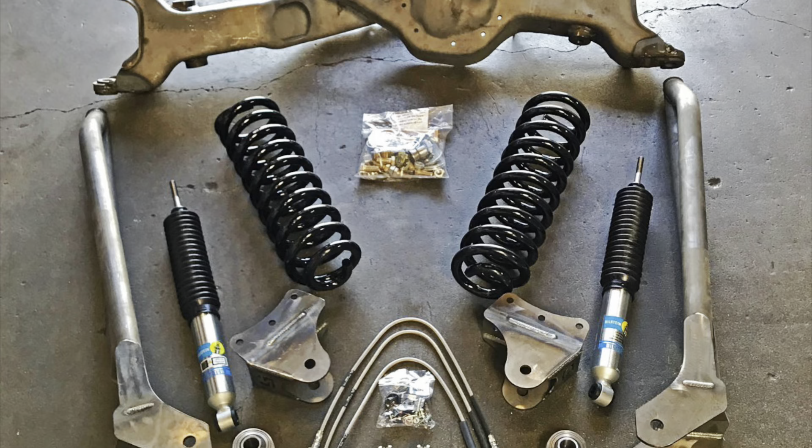Today we'll be talking about how to install the Solo Motorsports coil spring conversion kit, designed specifically for the F250 diesel truck. This kit also works for Broncos, depending on what year you have, but I'd recommend checking directly with Solo on that. I'm not an expert on Broncos, but most everything on a Bronco is pretty similar to the F250s. That's why this kit was designed to be a long travel kit for both.

The kit does come with instructions, but it's mainly just 4 photos. So I figured I'd show you an exploded view of the twin traction beam that you currently have on your truck if you've bought this kit.

Now, this is more detailed than you really need, but in essence, you're going to need all these Dana parts if they're fried. Like me, mine was fried except for the pumpkin itself. You can just reseal the pumpkin.

It won't be difficult to find those parts, and I'll have them in this video as well. But I figured it'd be useful to have this since it's all over the internet, and to know exactly what you're doing before you start removing these pieces, because you can easily damage your pumpkin if you don't remove it correctly.

You can lose some of these Dana parts pretty quickly whenever you're disassembling these parts, and it'll be hard to measure after you've removed them. For instance, your U-joints, you want to make sure you keep those.

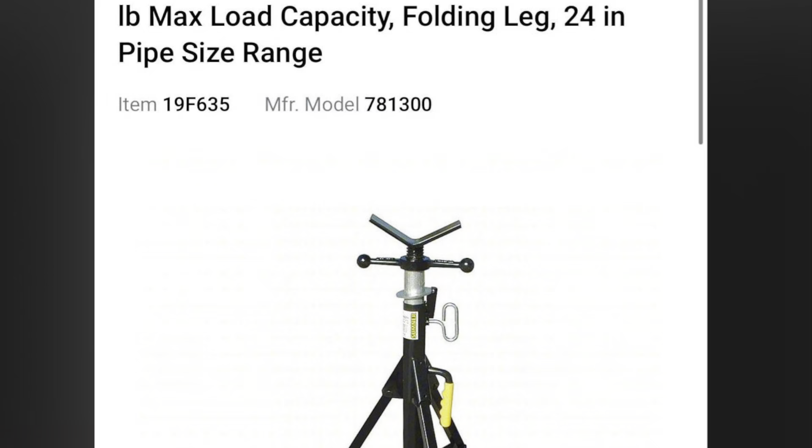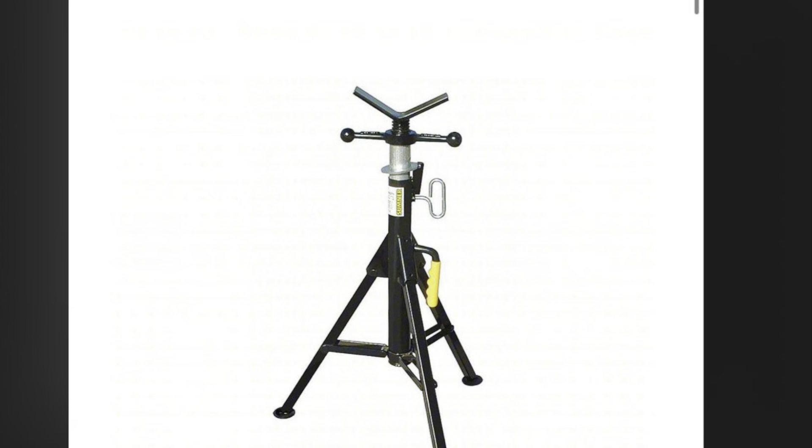Now, before you start this build, make sure that you've got a jack stand that looks like this. It'll really help you with raising and lowering the truck. You're going to need it for alignments as well. I didn't actually have to use it—I used a similar model, one of the larger 10K jack stands you can buy at O'Reilly's or AutoZone. Costs about $200. Safety is priority, guys.

All right, and this tool right here just makes your life so much easier. You want to make sure you mount these at the very front, near where your bumper's at. Take off your front bumper, by the way, to make it easier to get inside and get underneath the truck.

So step 1 in the disassembly of the twin traction beam is to remove your hubs, your spindle nuts, and all of your bearings, your lock washers, everything inside the housing. You want to make it a priority to put those aside in order in which you disassembled them. Don't lose those parts. You're going to need replacements, and it's very difficult sometimes because Ford in 1996 and 1997 was very finicky on the parts they selected, and sometimes they don't always match each other.

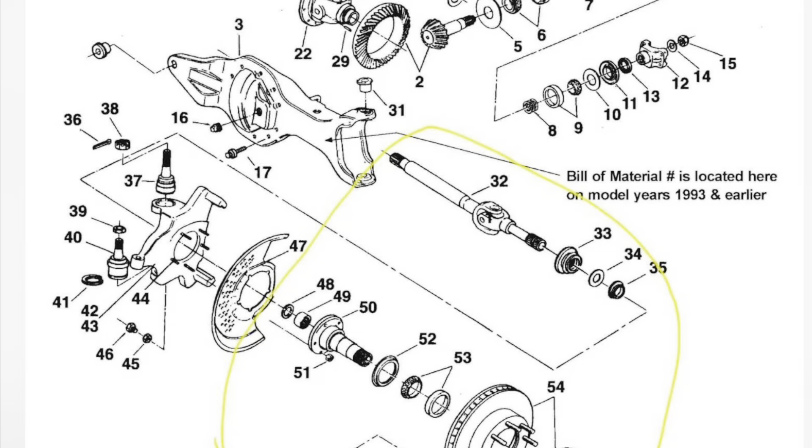Some people might have 4-wheel drive trucks, some might have 2-wheel drive trucks. If you had a different year from '95, some of your spindle nuts may not match, and you might have to get a different tool to remove these pieces. Very important to keep order of your parts as you disassemble.

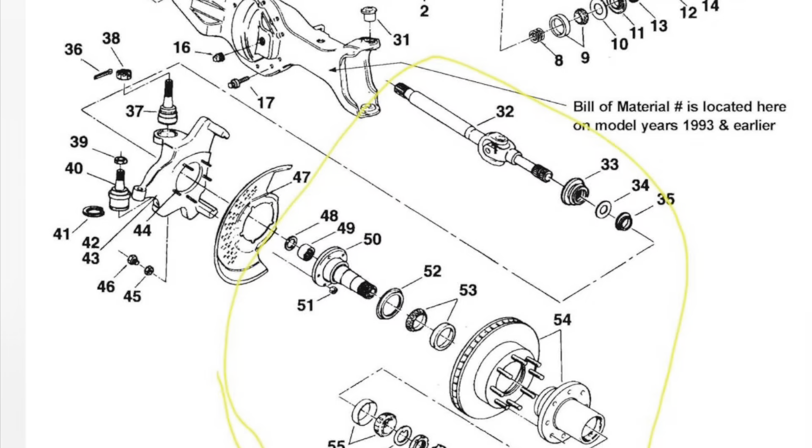Your next order of business will be the bushing at the top, which is part 31 in this schematic. Part 31 can give you a real pain in the neck to remove.

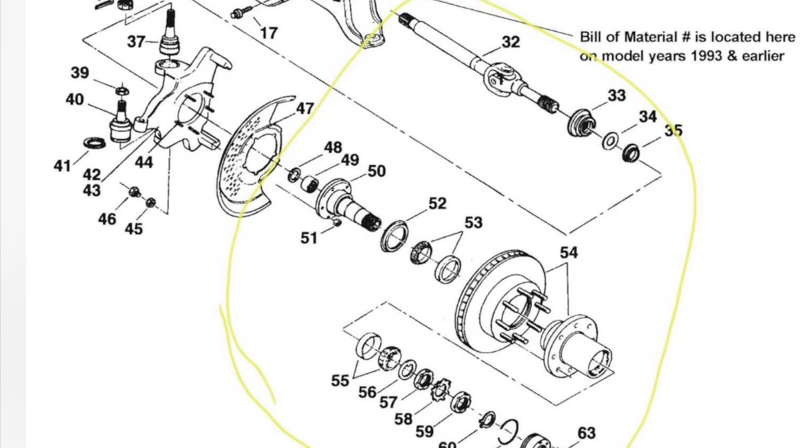I think I should also mention that finding the right Dana parts, such as your ball joints or any of the bushings connected to the twin traction beam, you need to keep account of.

So your very first order of business would look like this: your tire and wheel are off. You can get these rotors resurfaced, guys, you don't have to throw away your rotors. I had to get rid of mine because they were in bad shape and it was time.

But your first order of business here is taking apart everything you see in front of you, just as the image showed in the last exploded diagrams. I'm going to show some more here in a second. I'm not going to go into full excruciating detail about how to do this—there's plenty of videos online about how to take apart the hub and the 4-wheel drive assemblies. Just make sure, like I said, keep everything you have.

Before you start digging into this axle, your Ford manual will tell you the D85T-1197-A is the tool you're going to need to get out some of your nuts. Now, everybody has a different tool for this. Even though it says it in the manual, some of us have ones with indirect teeth, some with shaved down teeth, others are jagged.

It really just depends on if you have manual or automatic locking hubs, four-wheel drive or two-wheel drive. Here's your exploded diagram in the Ford manual with your inner and outer locking pin. Want to pay attention, one thing I'm showing you this document for is just the purpose of that pin. That pin can be very hard to locate, and if it's sheared off, you need to get a new inner lock nut.

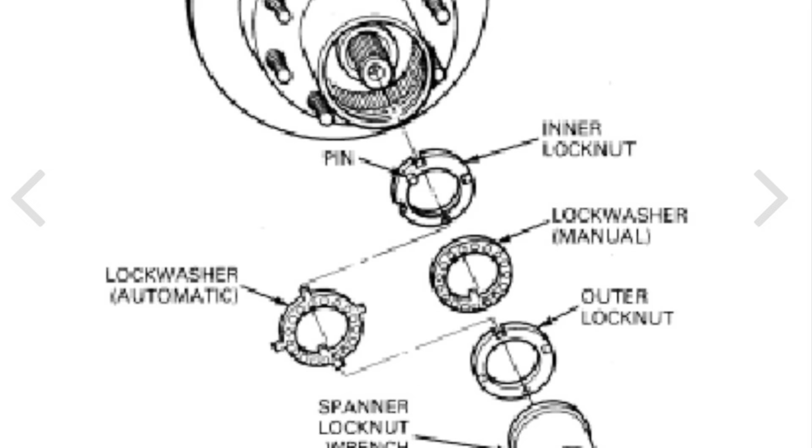Your manual lock washer and your automatic lock washer have different identifications. One has more slots than the other, and one has squared off slots on the outside with a tooth. That's where that difference in your tool is going to come into play, like I was discussing just a second ago, ordering the right tool based off the lock washer you have.

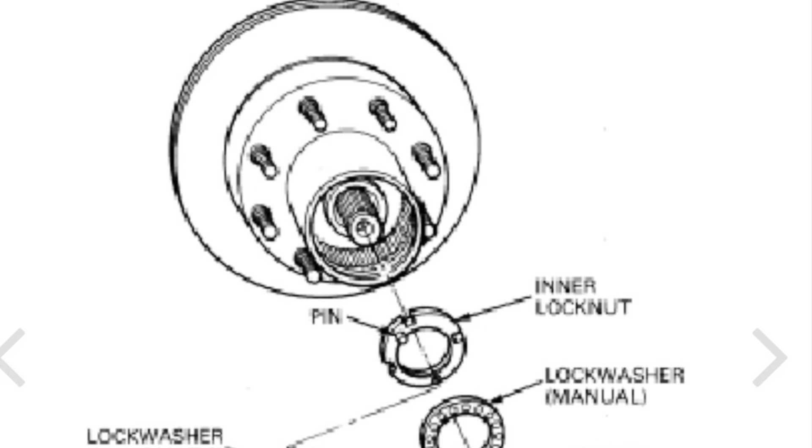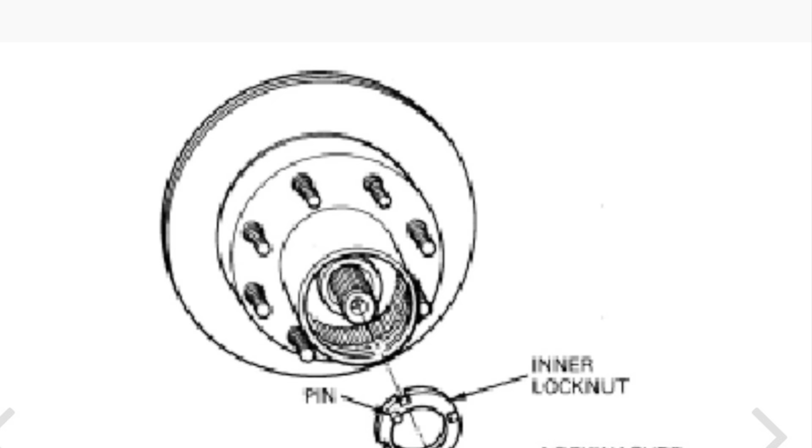So get in there, take a picture of what you have if you're not sure. There's plenty of Ford groups out there that can help, but all I can say is pay attention to what you have before you go buy a bunch of stuff. I went out and bought some kits and blindly did not realize what I needed. I won't lie to you guys, it's difficult to figure out which one is the right lock washer kit to buy because there's so many people saying that, hey, this is the right kit, Ford says it's the right kit. No, just because Ford says it's the right kit doesn't mean it's actually going to be specific to your truck.

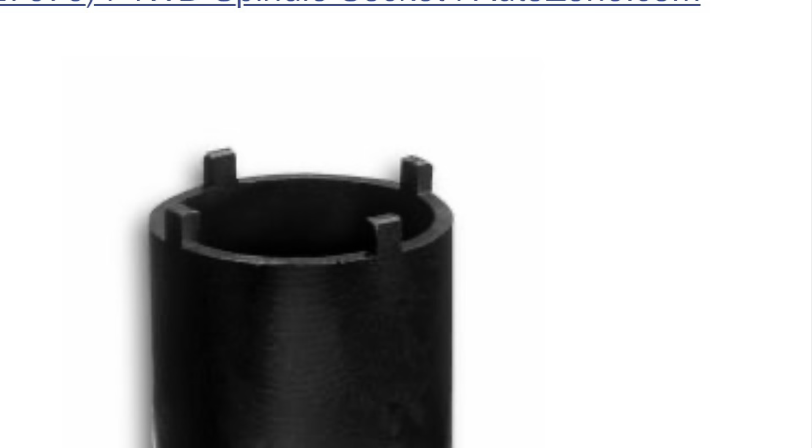This is the tool that was specific to my truck. If you had four-wheel drive, 1997 F250 with manual locking hubs, this one worked perfectly for what I needed it for. Didn't have to shave it down, didn't have to alter it. It worked great for the first lock nut. Now everything after that was this oddly shaped lock nut that you can find on, what's it called, Torque King sells it, and it has a strange configuration. It's kind of wave-like. That one will work for this truck.

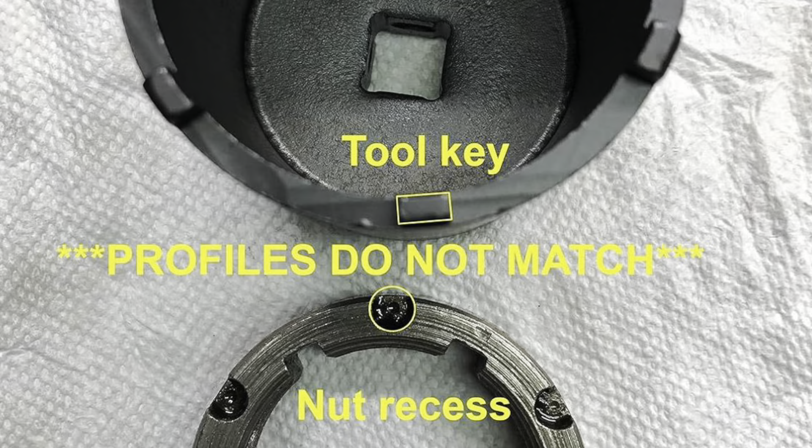Some of you might end up in this guy's scenario where you had to shave it down. This is an example, this is what I had on my truck for the manual locking hubs for my 96 F250 diesel. That lock nut is typically the one that gives you the most problems, as well as the one behind it, they tend to get seized up. So your tool number 5 right there listed is that tool I was talking about earlier.

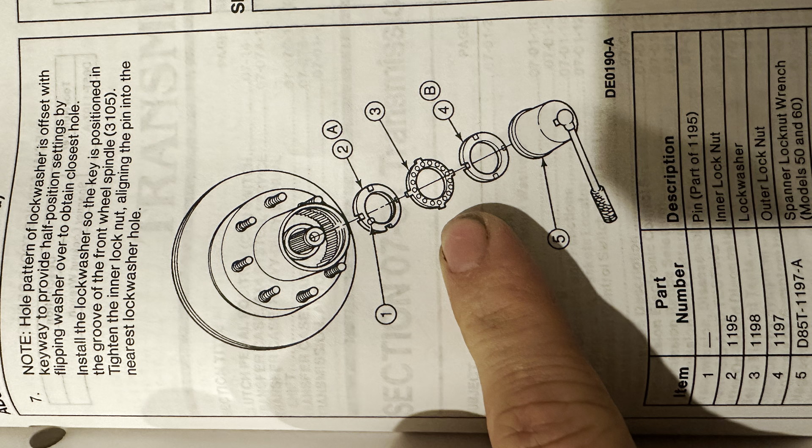So at this point, you've already disassembled your hub. In this photo, the hub is showing. So you're going to move on to your top castle nut and your bushings. These gave me a real hard time, guys, this was a pain in the neck. I ended up having to take these to a shop to get them pressed out because I did not have air tools.

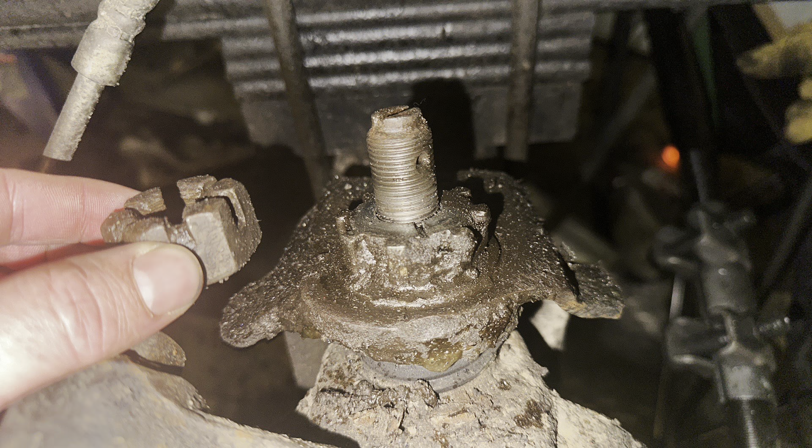Same scenario here, getting off the top castle nut with your cotter pin. Only the upper ball joint will have a cotter pin and a castle nut. The lower does not, it's got a low profile nut, and that is specifically designed for the housing, so you can get your spindle and everything else and your axle seals and all that jazz straight through and have plenty of space. I'm simply just showing you this photo so that you have an idea of how gummed up and nasty these can get. They have a retainer pin, and that's what keeps it in place.

But you got to be really careful, guys, before you buy this kit. Go down and look at your pivot brackets, because mine had 5 bolts. Some people have 3 bolts and a 2 bolt or a 4 bolt or a 5 bolt. 97, 96, they did whatever they felt like, guys. Ford just did not really document any of this.

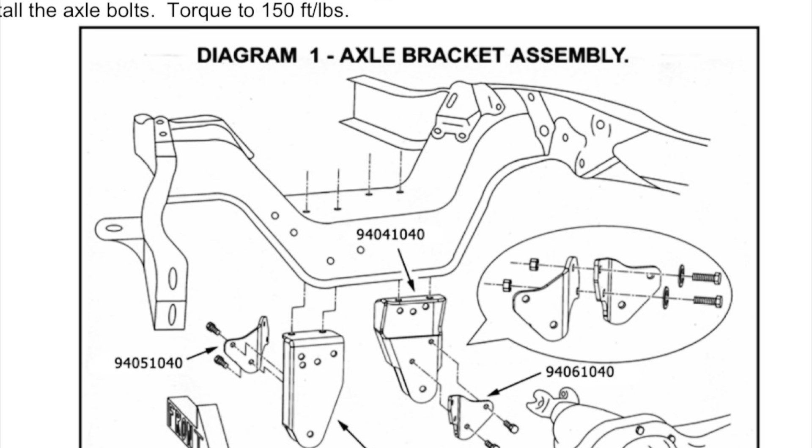I was the only documented truck to have 2 5-bolt brackets with opposite mirrored configurations of the bolt. That meant that I had to get a custom-made bracket from Solo, and even he couldn't help me. I ended up having to look online, ended up fabbing my own in the shop just by boring through some holes.

Now, this is what the F250 should look like. Most everybody will have this 3-bolt assembly. Where your other 2 bolts come into play would be going in underneath the engine mount themselves. And I will say, if your engine mounts are melted or if they're collapsing, you're going to have a heck of a time trying to get a wrench underneath there to tighten those bolts.

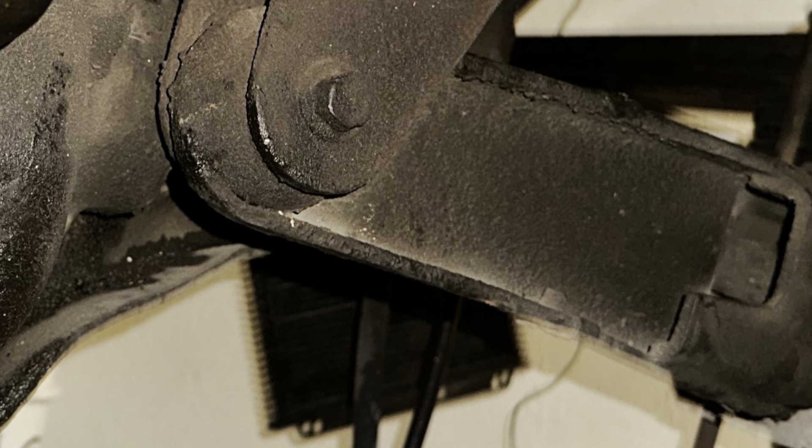So moving right along, these are some original pictures of my pivot brackets. This was the driver's side, actually. They're opposite the way they're listed. Even though the bolt configuration might be right underneath the seat, that is not how they list them. They're opposite, so when you order them, be careful. Driver's side is passenger side is driver's side.

These were real beat up on mine. They were not OEM. I had drop brackets. Some of you might have drop brackets. Just make sure that you get some OEM ones. If you do have OEM brackets, hang on to those things.

They are gold. Here's some more images of what my brackets looked like when I first got them, and I took a look and inspected. I was missing bolts, guys. It's really dangerous, you know, whether you inspect these parts or not, okay?

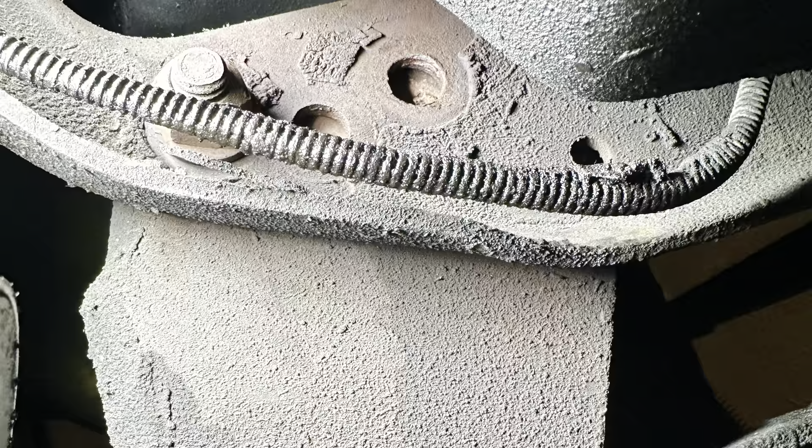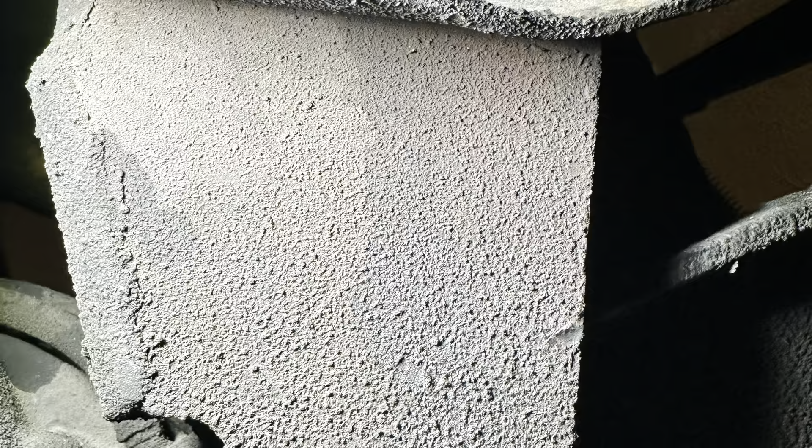This is another image of the drop bracket in the front. I only had 2 bolts holding on what should have been a 5 bolt, all right? Very unsafe. This is kind of what triggered me to start this whole project and to do it right.

And to really take my time and document everything for my own safety. And then this guy right here is what it looked like on the front. Nothing was holding that bracket, like I said. And it was very seized up, cracked, and rusted as well. So just a very bad scenario that I had.

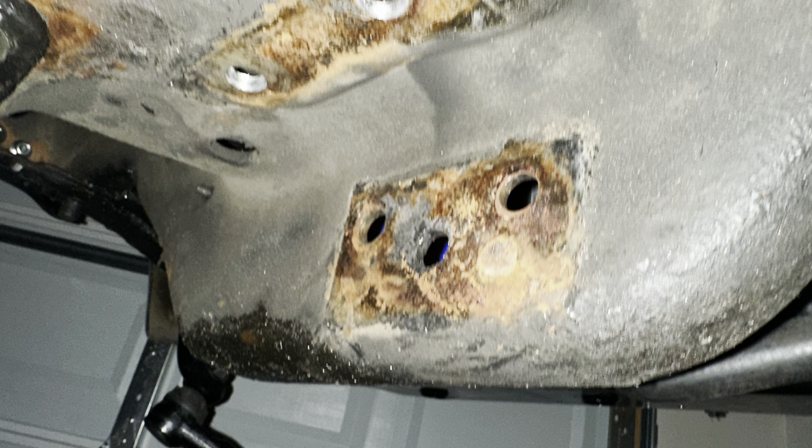And this was after I removed the parts. You want to make sure that you put anti-seize on this surface, grind it off, clean it up, rebore out the holes, clean them up out the top, make sure that it's all deburred and everything, so when you put those new bolts through, you won't get caught on any edges. It's just imperative that you pay attention to detail for these little things, because it's going to make your life a lot easier when you go to install these brackets and you don't have to rebore out any of the holes.

For some of you, if you have a 2-inch lift or your 4-inch lift, this is an example of a 4-inch lifted truck. This is what I had. It was a jerry-rigged, crappy lift that somebody installed on this truck.

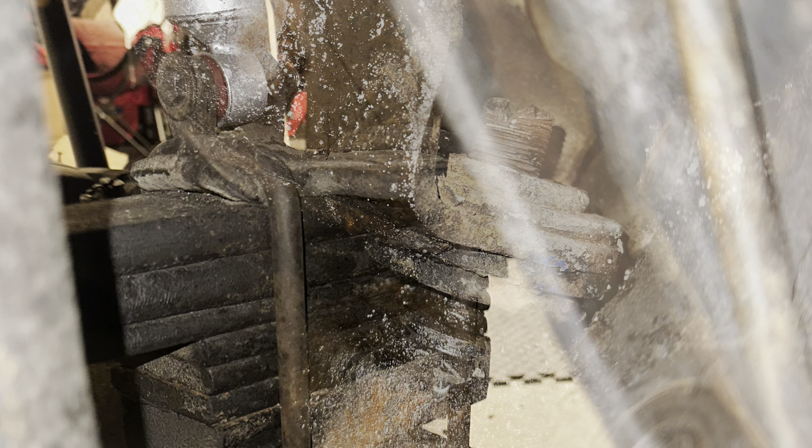Now, if you've made it this far, you might know that I brought up the upper and lower ball joints giving you a hard time. Yeah, this is a picture of one that was totally destroyed. You can see where I've been beating it to heck on the top of the axle ball joint nut, and it just wouldn't come out. So wanted to show you this one last time just as a reminder.

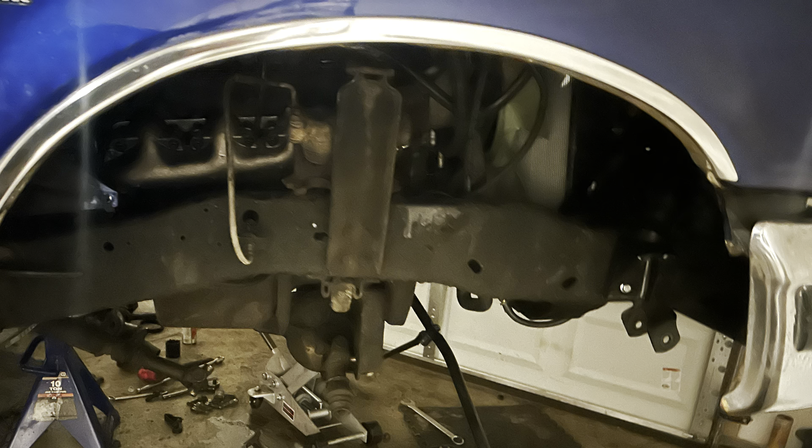Congratulations, if you've made it this far, you've only just begun. So the shock tower needs to come out at this point. Everything should look like this. Shock tower is easy. It's just 4 bolts behind the frame.

Underneath the shock tower, there will be a bump stop. You need to grind off that bump stop, cut it off, do whatever you need to do. All of the rivets underneath there, at least 2 of them, must come out. Drive them out of the frame, cut them out, do whatever you got to do. I personally drilled them. Those are going to be your bore points for the coil buckets at the top that you're actually going to put your shock and reservoir into.

And then off to the left, you'll see the bracket for the braided cable that's connected to your brake line. You have to grind off that bracket off of the frame.

Otherwise your bucket will not be able to. All right, your last order of business at this point would be to drop your pumpkin.

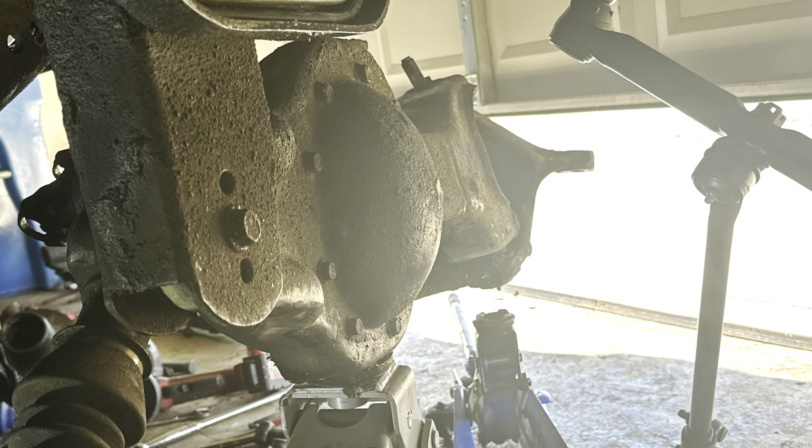I'm not going to go on how I did that because honestly it was a pain in the neck. It's a lot easier if you have the buddy system. If you don't, use a jack stand, slowly lower it, let it hit the ground. I'd suggest unbolting it first before you do that off of the axle housing. That way the pumpkin just drops into an oil pan and it'll drop all of your oil. There really is no drain for this thing, unfortunately. The drain at the front is only for a fill plug, so it doesn't drain.

After an hour of wrestling with the pumpkin, this is probably how you're going to feel. You're going to be pretty mad and pretty angry, and you might even need a drink. But it's out. Congrats.

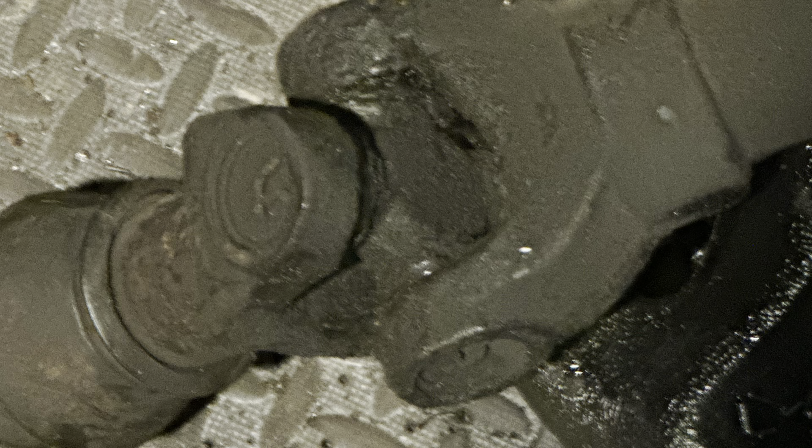Showing you this picture for a reason. This is your U-joint connected to the pumpkin, the short side, driver's side. This is how nasty they can get, guys. Got to rebuild these, got to rebuild the boot, might even need a new boot. Make sure you take off that boot and clean out everything inside it after it's dropped before you reinstall. I've got videos on this as well, but for the most part you know what to do.

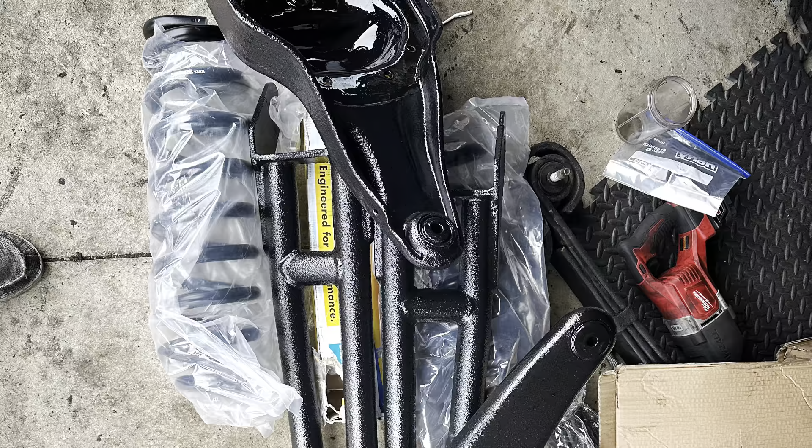All right, if you've made it this far, then you've already received your kit. Go ahead and get those parts painted or Line-Xed. I had mine Line-Xed. Everything you see here is kind of what came in the kit, I had already pulled it out of the box. You've got your coilovers, your radius arms, your twin traction beams that are cut and turned. If you want to do some Googling on that and understand what that means, that cut and turn terminology, I didn't know what it meant when I first bought the kit. So do some Googling, and you might even be able to do it yourself if you still feel inclined.

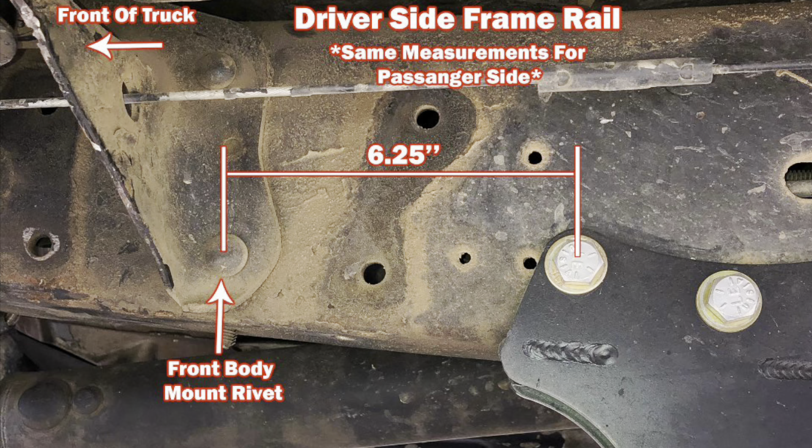Something I probably should have mentioned right off the get-go, you need to cut off your old leaf spring connections. They're going to get in your way of your radius arm. Once you've done that, then you need to make sure you get that measurement correct that's in this image. Front of body mount at pivot joint was 6.25 inches from the first bolt on the left bracket that connects to your radius arms on the driver's side rail.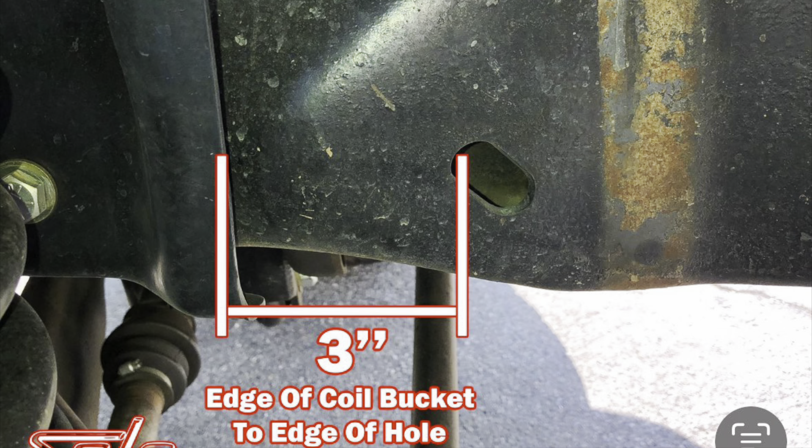This is an image of the passenger side frame rail underneath the wheel well, to the right of where your coil bucket would sit after installation. That 3-inch measurement is directly to the edge of this hole. Every F250 truck has that hole, so you don't have to be concerned about whether it's going to exist on your frame or not. It doesn't have to be exactly specific, but you've got to get within 1/8 of an inch for it to at least get close. In this image, the front of the truck is facing to the left, so it's like if you were standing in front of the wheel well.

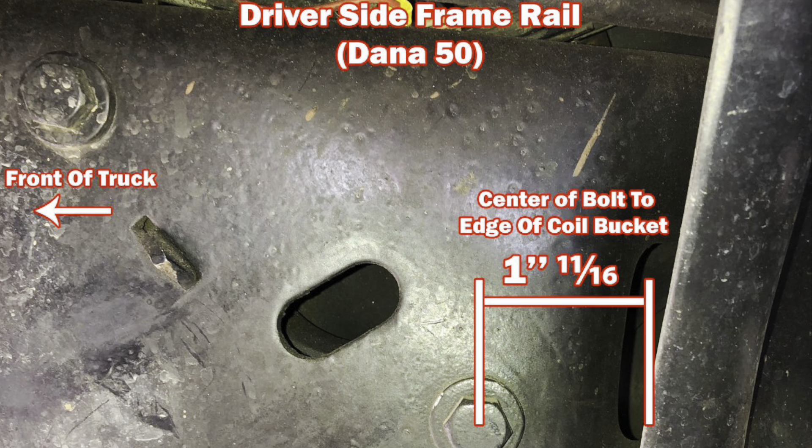It's a little more mission critical that you get the left side correct, because this kind of screws with the bottom rivet that's underneath - everybody has a big old fat rivet underneath there, and it's going to be in your way. So be 1 inch and 11/16 from the edge of that coil bucket in order to achieve the correct placement of everything. Things are going to be probably slightly different on every truck, but most everybody has the same exact bolt configuration. So go from the center of that bolt to the edge of the coil bucket, and guys, you'll be golden. It's just kind of important that you get these measurements correct.

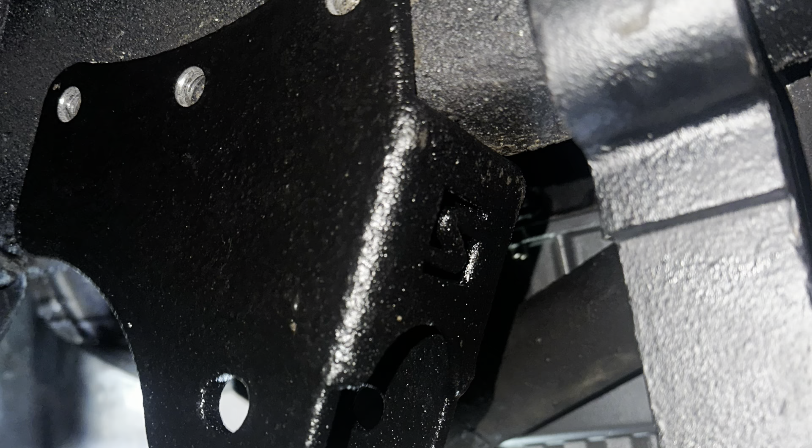Here's an image of the left side radius arm mount after I had bolted it in from the bottom. There's 2 bolts underneath the bottom of these mounts. You want to bore those first based off the directions, and then bore the other ones through the top of the frame because it'll all line itself up. It's kind of important to get the bottom ones first, okay?

Here's an image of what that looks like when you're done. The top bolts are all bolted up, and you're ready to rumble. You're just going to put your pin straight through for your radius arms. In this next image, I'll show you what that looks like. You're going to have these 2 oddly shaped bushings.

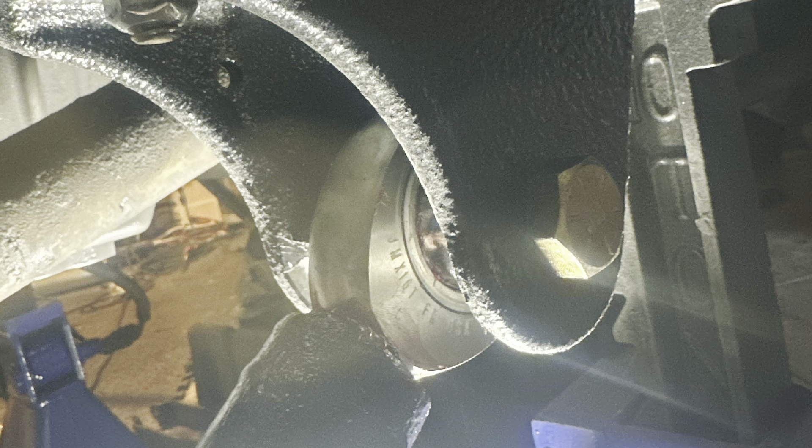In this image you've got everything bolted up. You've got your Heim joint inside with your jam nut. Your jam nut is the big fat nut. You don't see it in this image because I had not installed it, I was just doing measurements. But you need to make sure there are 3 threads exposed on the large jam nut that goes on top of this, so it'll come butted up close to the end of the radius arm, and you want to put anti-seize on everything.

I would also go ahead and take it a step further and put some lithium grease inside of your Heim joint. There's going to be 2 coupled bushings in between. You put that on.

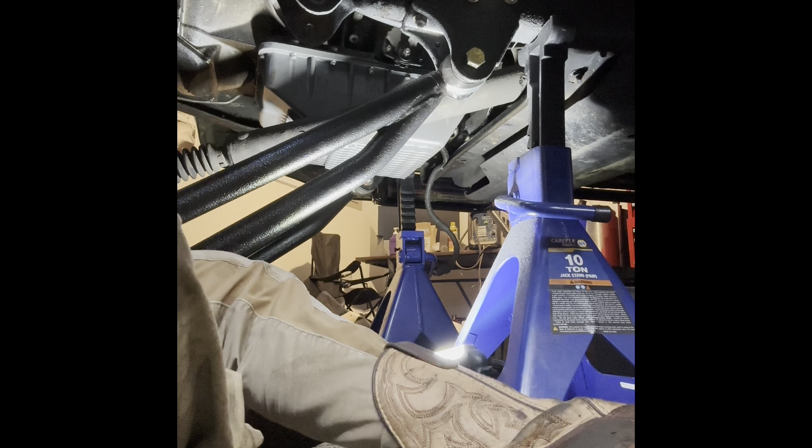This is me just having a good old time trying to install these radius arms. I believe the wrench I was using was 1 inch and 11/16 on the left side, and just an adjustable on the right. I would recommend getting yourself 2 of the big wrenches - they're different size nuts on both sides. My mistake here was getting these all tight and then forgetting the jam nut. Don't be me, all right? Learn from my mistakes - that's why I'm making this video.

Here's part of your finished product. Just remember, like I said, add the jam nut to the inside of both radius arms. Your next step would be to attach the radius arms to the twin traction beams - use a mallet for that. Make sure the surface is free of paint, because mine was not, and I had a hard time.

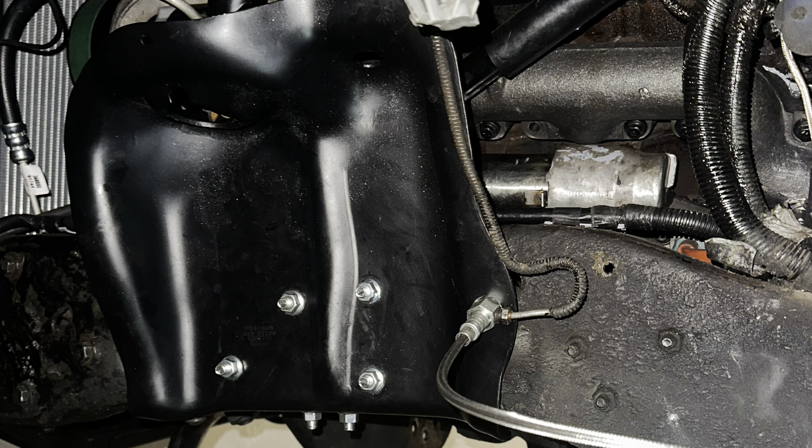Next order of business is installing your coil buckets. Like I said, you got to bore those holes based off the directions and match up what you have here. This is all pure measurement, guys - there is no stencil provided for this. Just dodge the rivets underneath the frame.

On the right side, you're going to have to bore in about 1/16 of an inch into the coil bucket where that 6-sided brake line connects. Then make sure you have those brake lines sheared off - like I said, they've got to be cut off the frame.

Here's your finished product, the coil bucket. On the right side, again, take note of that braided brake line. There's a retainer clip that is gold that he'll give you to replace your OEM one. That one has to punch through on the back side. If it doesn't, this brake line will be free floating, and you really don't want that because over time it's going to wear and snap, and then you'll have broken brake lines. Twin traction beams like to move up and down, as you might know from the dynamics of the system's design, so you don't want that to happen.

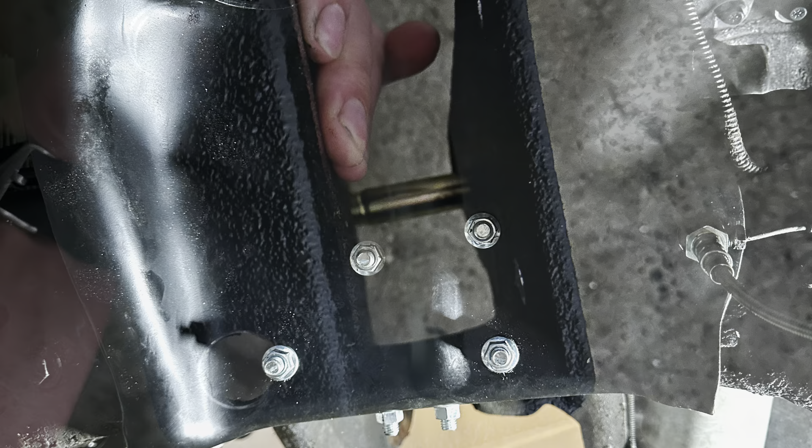Talking about bracketry - this was the bracket that was designed and he gave me that should have fit. This was a 3-bolt; it did not fit for the passenger side. I had a 5-bolt - this was my bad, I did not communicate that to him. Same goes for the other side. This is what the top side of it looks like - you see 2 bolts and then 2 bolts on this side. The top does not change, but the back does.

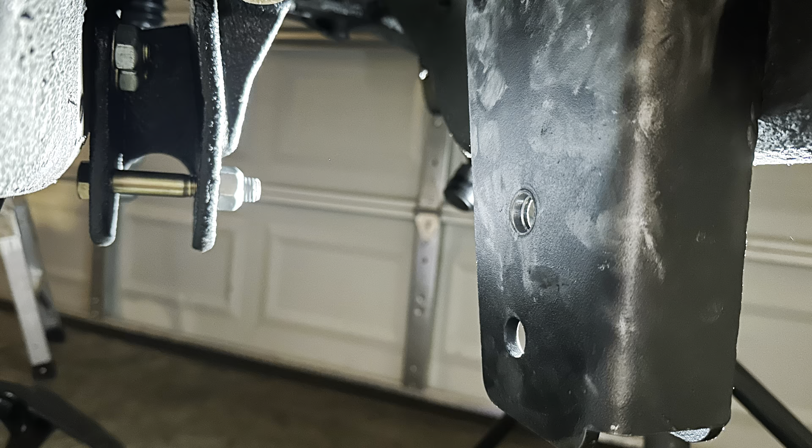Here is your finished product. Once this is installed, I had to custom fab the right side. You don't have to do this, but clean up your mating surface on the pumpkin and rethread all those holes - you'll make it a lot easier on yourself. They're going to be gummed up and full of rust if you haven't touched this pumpkin in 50,000 or 40,000 or 100,000 miles, whatever it is. You don't have to do this, like I said, but I would recommend it - it will make your life easier.

This is how clean that mating surface looks after I took some Scotch-Brite to it and cleaned all the grease off, and ran the bolts back through after they've been threaded.

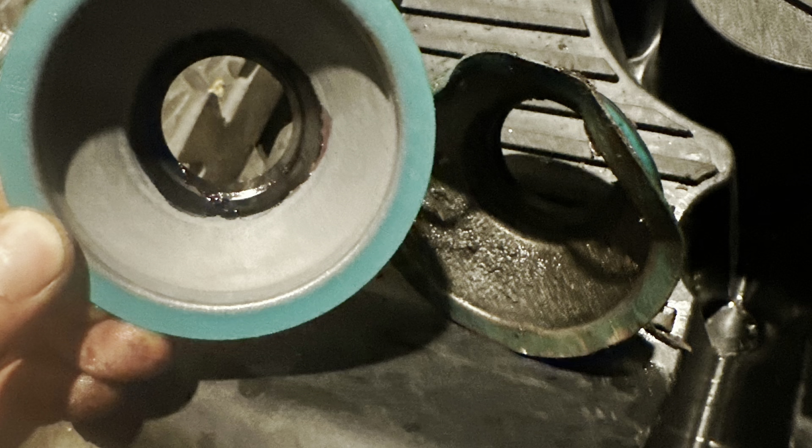In this image is the passenger side axle shaft seal that goes to the pumpkin. Off to the right, you see the old one - the reason it's all bent up is that's what it took to get it out of there. Honestly, these weren't in bad shape on mine, just covered in grease and kind of grimy, but it was time either way. I'd highly recommend you go ahead and do it - they recommended it in the kit as well. So, just a close-up view of what that looks like whenever it's fully installed.

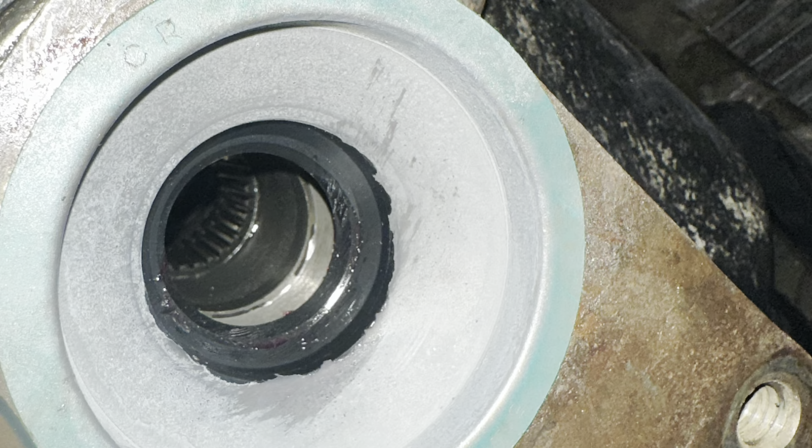Pro tip here: if you have any way of locking this up to a workbench at 90 degrees, I'd highly suggest it. The way it's sitting in this picture makes it a lot easier to conduct your work. I'd highly suggest setting up your beam housing on top of your pumpkin where the pumpkin's facing vertically, just like in this image, so the mating of the two surfaces doesn't have to happen at an angle while you're laying underneath the truck getting gasket sealer all over yourself. It's a lot easier to guide the beam on top of the axle housing and not make a mess. That way you can torque everything down, wait your 30 minutes, and then put it in.

Guys, I pride myself in doing more with a whole lot less. I had this Warner workbench rated for 300 pounds, and that pumpkin is roughly 250 to 300 pounds. I just slid it right across. This is usually a 2-man operation, and this thing's so awkward to lift, but it just happened to be the right height. I think this bench is about 2.5 feet tall, so if you need to find one that's similar, that's how I got it pinned up and did this by myself. If you don't have a buddy or family member to help lift this, I'd highly suggest it.

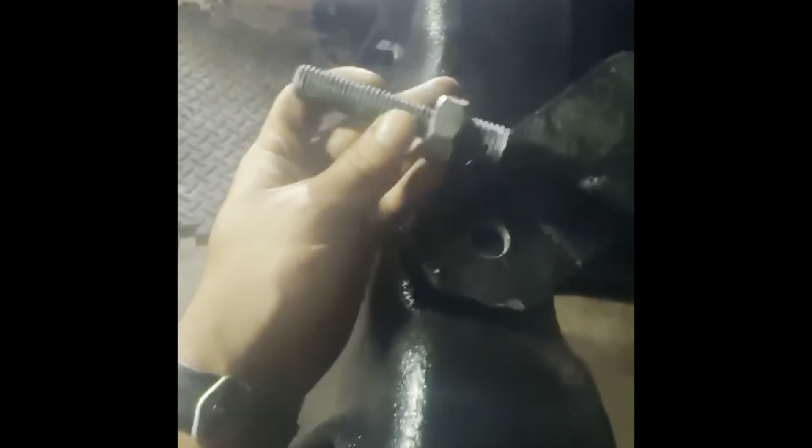This piece of hardware is provided in your kit. It will have more threads than needed on the right side of that nut. You need to cut off about 5 threads so it does not go all the way to the bottom and bottom out. That's just the way the kit is designed, that's what he gives you.

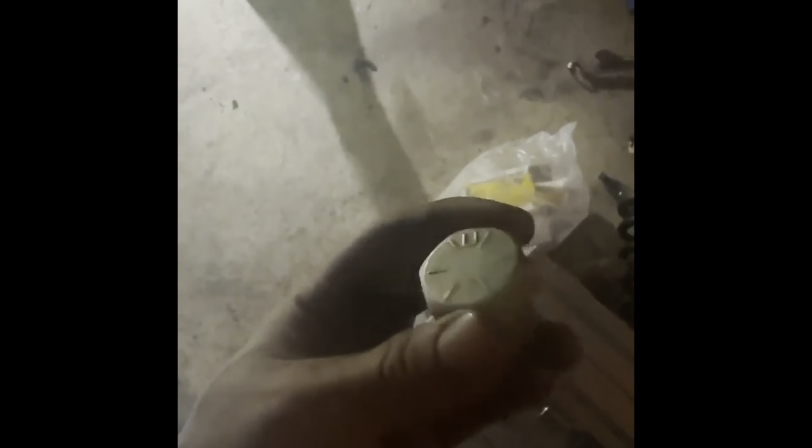This bottom bolt serves the same function as the top one. The top one is for the coil spring bucket, while the bottom one actually supports the entire load. You have to cut about 3 threads off this one with a grinder in order to get it to bottom out completely, so it meets the mating surface and you can torque it. Make sure you deburr it and grind it down properly before you do this, then add some anti-seize and the washer.

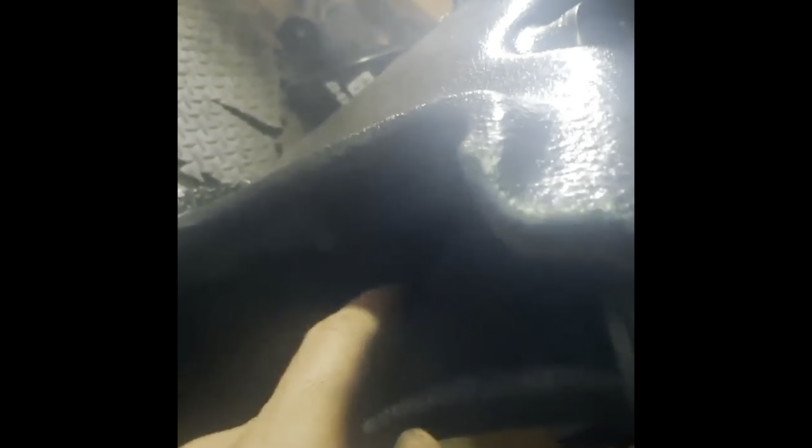I've already covered this, but this is actually a washer that holds your spring in place.

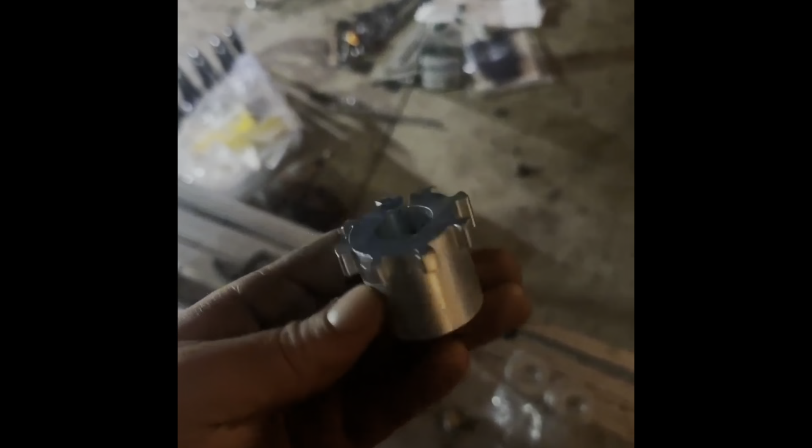We're backtracking here, but this bushing is what's going to be pointing towards the driver's side or the passenger side based on what orientation you're in on the truck, and I'm about to show you what I mean. It has to be sitting at this angle - that's how it's designed to be put in. You don't want to change that. Even an alignment shop shouldn't need to change that.

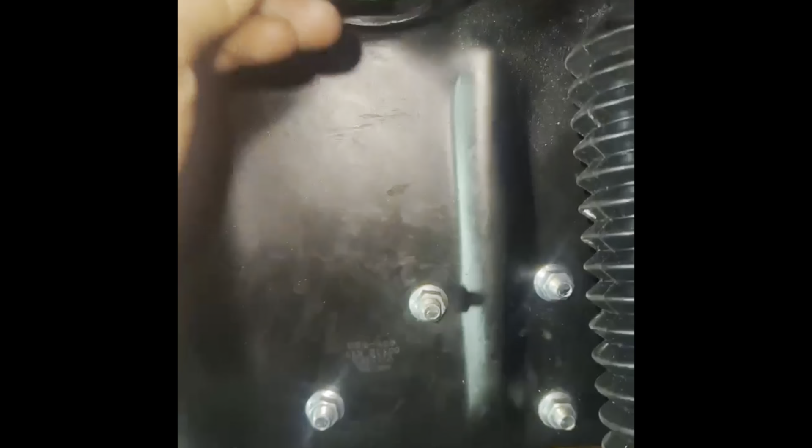Over time, a lot of these Fords tend to toe in, toe out, and camber - that's because this moves. Here I'm showing you what your spring retention hardware is and how it fits into that little slot. The coilover you'll be provided with will not be able to fit inside that without really torquing it down, so I ended up having to bore that hole out about 3/16 of an inch wider for a 3/8 inch bolt.

He gives you some smaller hardware, but I personally could not get that hardware to fit, so I changed it.

Here's another video of me talking about how I placed the nuts underneath and what rivets were in the way. Got to do some rivet dodging underneath, guys - pick and choose your battles. If you want to fight all the rivets, you can, but if you remove all of them, remember that hardware you took out of the frame must be replaced with new hardware because those are structural components.

I'm also discussing here what that brake line looked like on the right.

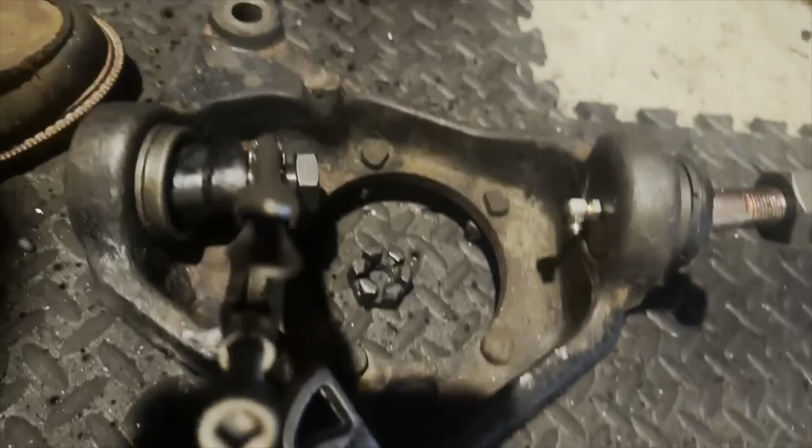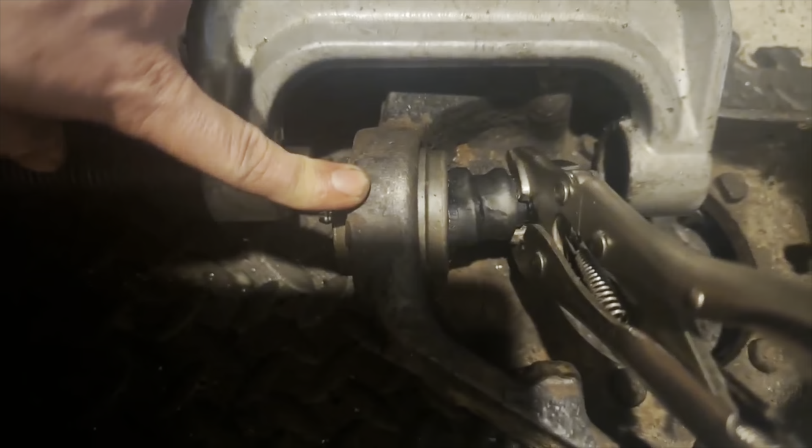If you have Moog ball joints, there's a common issue with the bottom retainer nut on the lower ball joint. If it's not forced all the way through the twin traction beam housing and gripping the surface inside that hole, you won't be able to drive the nut on, and you'll think something's wrong with the ball joint, and you'll end up fighting it like I was doing here. Really, what it boils down to is tightening the upper nut on the upper ball joint - that's all you need to do.

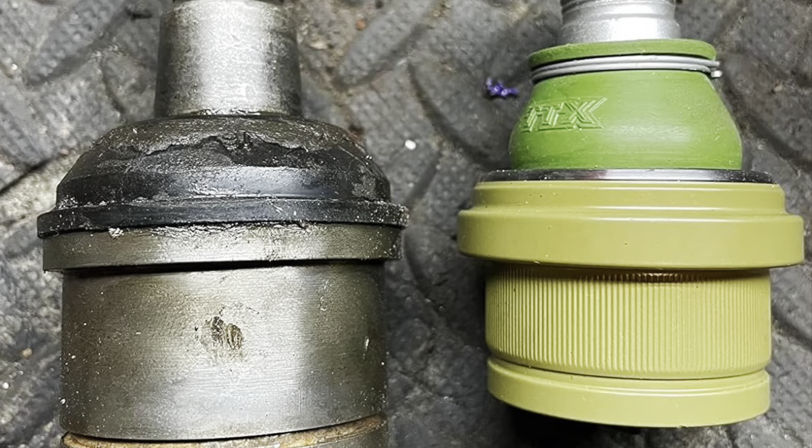All I'm here showing you is the difference between a stock ball joint and these new ball joints called TTX. TTX makes a great brand. I would still aim to get these, but be careful of getting the wrong length.

This is your lower ball joint, what they commonly refer to as the kingpin on the D50s and D60s. By the way, D50 and D60 lower ball joints are the same depending on what year you have. If you have a 96, 97, 95, they're all going to be the same, and I believe even 92s are the same if you have four-wheel drive. Make sure that you list that you have four-wheel drive if you go into AutoZone or O'Reilly's, because the two-wheel drive ones are not the same. Really important that you get this right, guys.

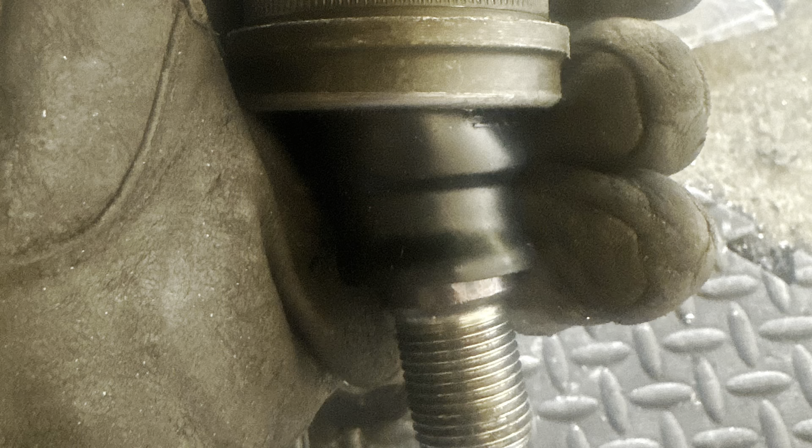Here's just an image of the lower ball joint that I ended up going with. Ended up being a Moog. Wasn't entirely dissatisfied with them, not entirely happy with them either. I'd rather go with Mevotech, or TTX Mevotech, which is their top brand. Those are the best ones.

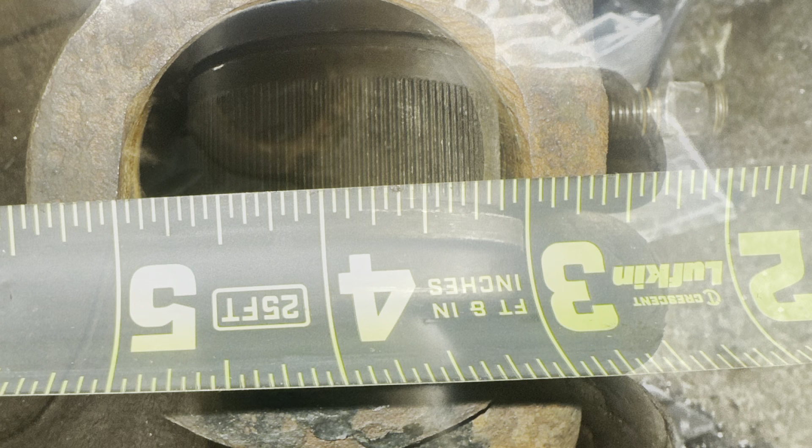If you have a four-wheel drive truck, odds are you got a 2-inch ball joint lower.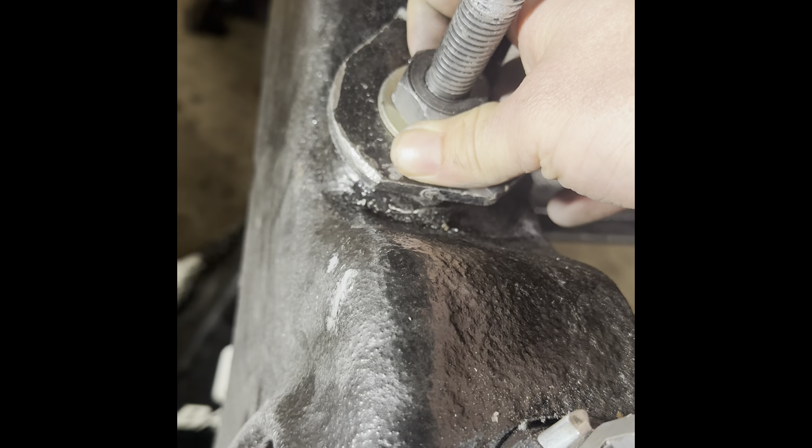All right, this is a highlight of a video I did earlier in a different series, but this is how everything is installed on the twin traction beam, and I'm talking about the placement of the washers.

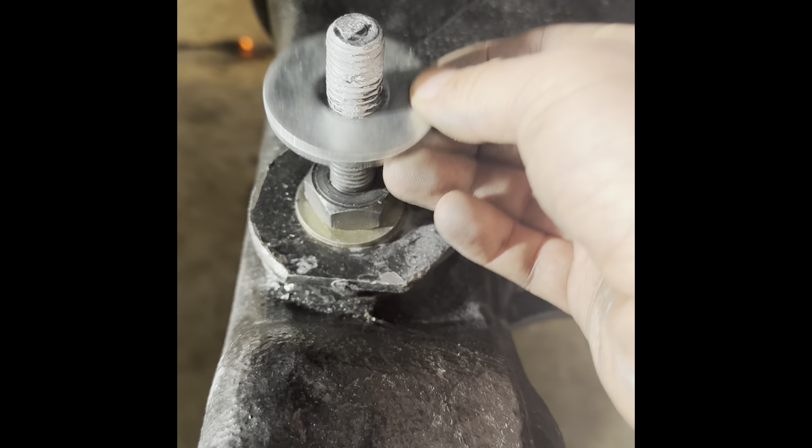Now he includes 4 silver washers in this kit. I called him just the other day and asked him what these silver washers are for, because they do not seem to really have a place. They don't need to be installed in the F250s, it's just for the Broncos. So just toss these things, save them for a rainy day, you don't need them. Nonetheless, this is kind of how you assemble things, excluding that washer.

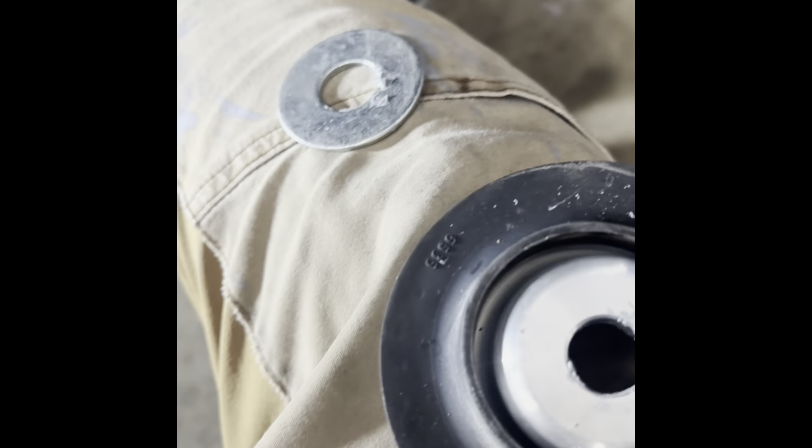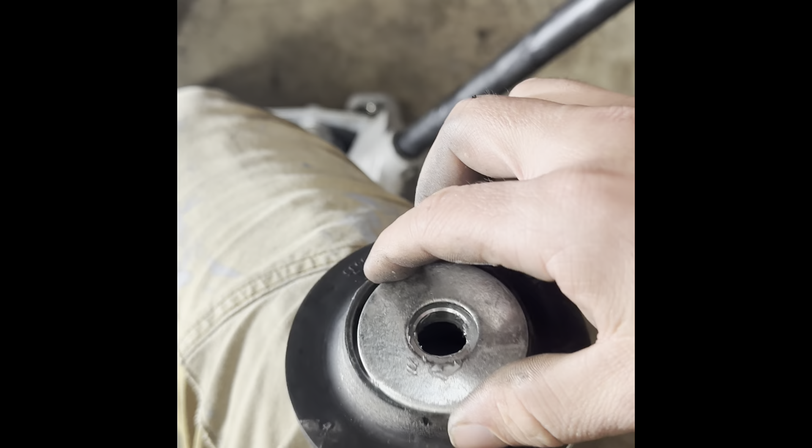Everything's kind of flipped upside down, sits right on top of that nut, as you can see in this video of how things are configured. Everything has an order in which it's installed, and it sits right on top of this nut.

Put some anti-seize underneath that surface. Make sure that you got that gold washer underneath there so it does not wear through on the nut. And then your coil buckets and everything will connect to this, your springs. And then you got another washer on top of that with another nut that sits on top of that.

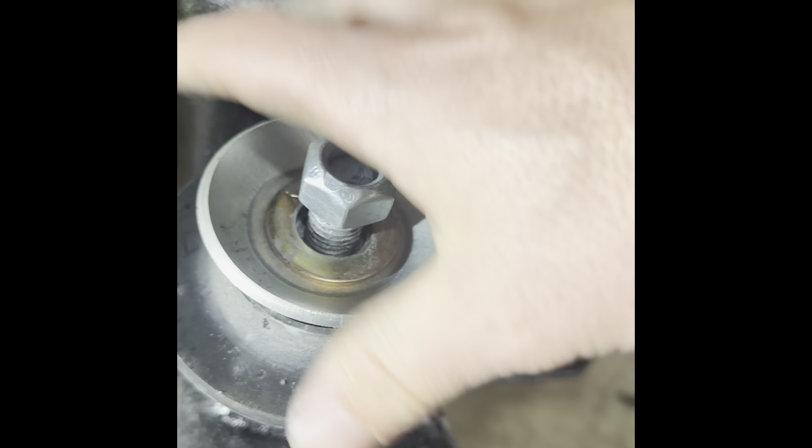And you can see I've got plenty of anti-seize installed here. Your spring itself, the coil part, will be retaining underneath there. And you can see in this video, I'm showing you that specific spot that the smaller end of the coil will sit on top of that.

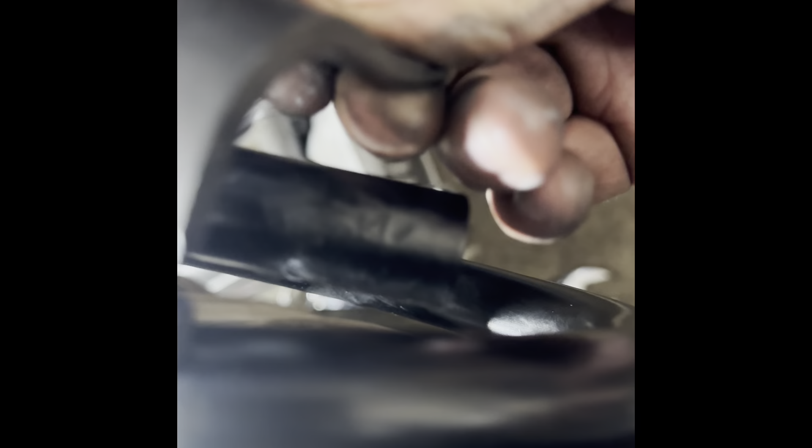If you've never installed these, I'm just kind of going through in a detailed fashion here because I hadn't done one in years. This retainer, this is exactly how it fits. On the very, very edge, it'll almost look like it's about to fall off, but it's not. That's just the way that it's designed.

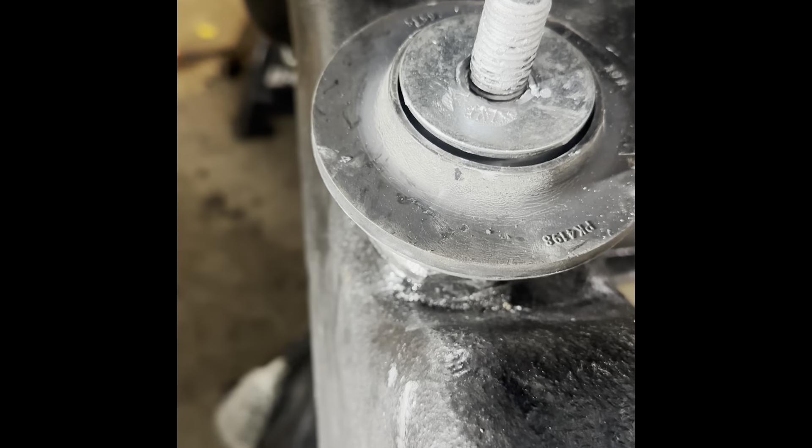Don't worry about these being perfect, guys, just get it mated up to that top surface. Like I said earlier, I had to bore through the top part of the bucket 3/8 of an inch in order to get a wide enough piece. And all I'm doing here is just showing you what that spring will look like when it sits on top of there.

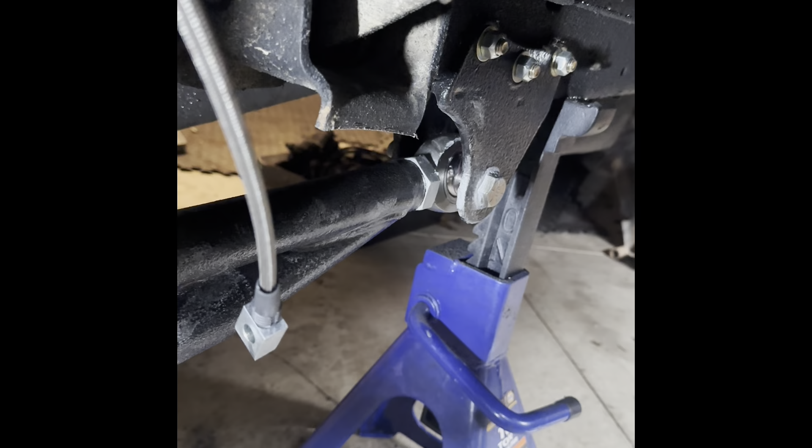That rubber bushing, let's talk about that for a second. It will tend to leave out some, it'll bust out pretty much. It'll look like it's about to fall off, but it's not.

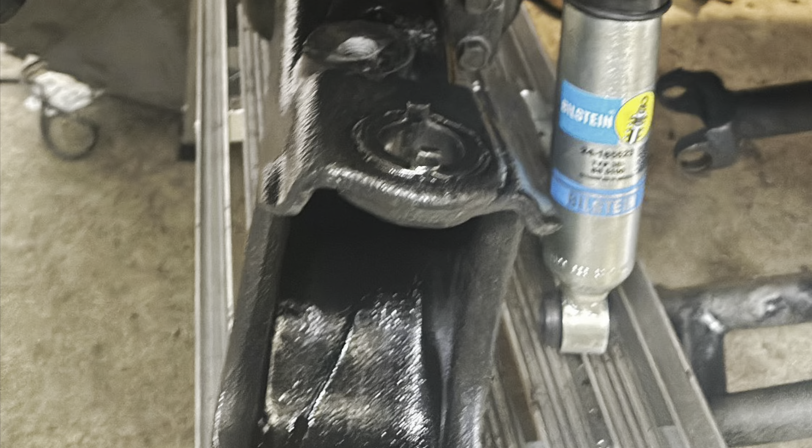So that's the hardware I was showing you again. It's good hardware, guys, but it's just too small, it's not long enough. I wasn't particularly a fan of it, and I also somehow or another managed to lose the nuts. I am showing you this picture as a representation of how high you need to have that traction beam up.

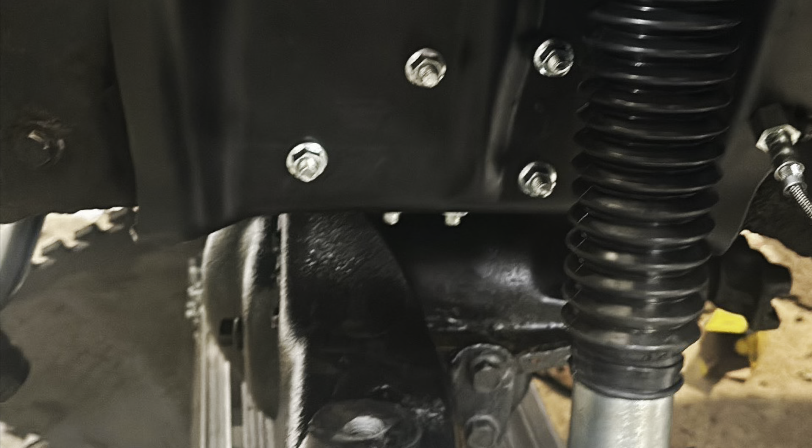And then let's talk about the dampening spring off to the right, the Bilsteins. There are two rubber bushings. One goes on the top side of the coil bucket with the retaining washer that's circular, and then there's another retaining washer that goes on the bottom of the rubber bushing on the inside of the Bilstein on the back side of the bucket, so they sandwich each other. That's how it works.